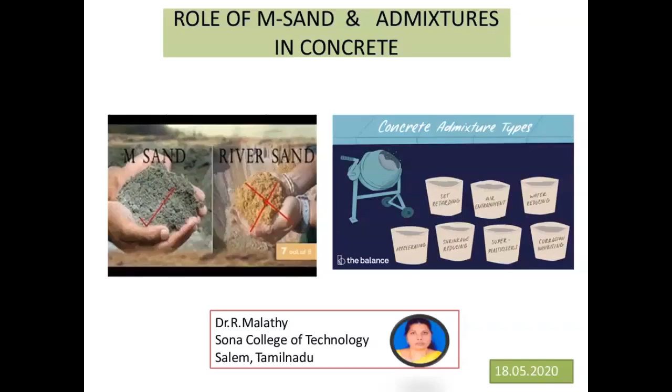So far, traditionally, we have used river sand or natural sand as fine aggregate, and that was the choice made by the constructors. But nowadays construction is going up, there are a lot of construction activities going on, and the utilization of river sand is also picking up. In that case, we cannot use that much river sand, and we cannot exploit the natural resources more. So we have to try to find an alternative for this fine aggregate.

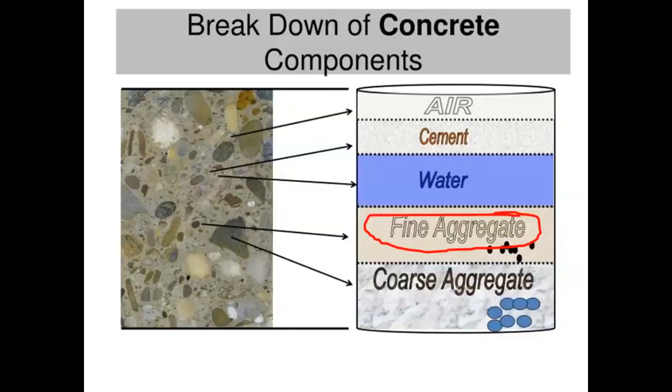In such a case, we are trying to make some M sand. M sand is nothing but manufactured sand. Most of us think M sand is crushed stone sand. It is not so. Whatever alternative material we are trying to use for replacing river sand is called M sand, not only crushed sand or crushed stone dust.

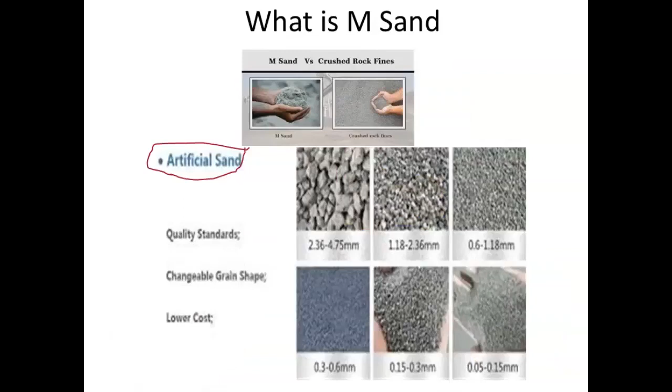So we have to go for M sand. M sand not only means crushed sand, it may be other materials also. There are some steel slag and other alternatives or industrial byproducts that can also be used as replacement for river sand. Why we have to go for M sand is the growing demand.

As I said already, there are a lot of construction works going on, and 30 to 35% of volume is used as fine aggregate. In such a case, there will be a demand, and also global scarcity is there. Now the government is banning it, and for remote locations we have to bring the river sand to that place. The transportation cost and energy consumption is going to be more, and also there are some impurities in the river sand.

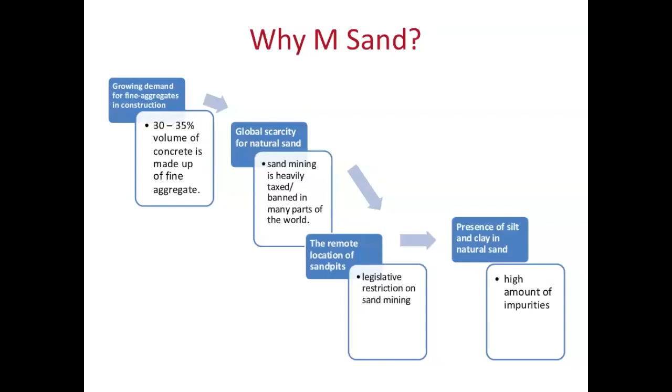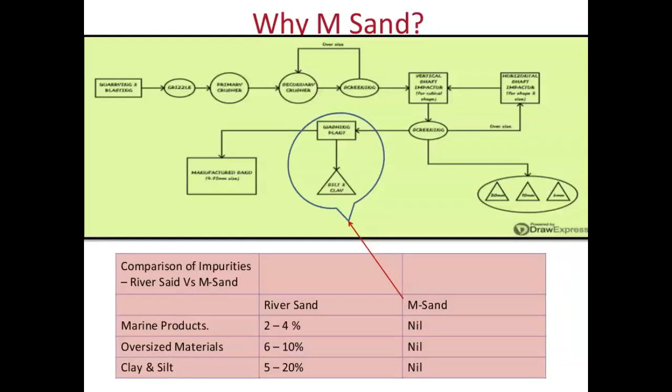Like clay particles and organic impurities, which may give some adverse effect. So we have to remove all these things, so instead we can go with M sand. If you see the process of making M sand, after washing the clay and silt, only then will it be brought to the site. Because of that, when you compare the impurities in river sand and M sand, there is no impurity in M sand, so definitely it will give good property.

When you compare natural sand and M sand - if you mine the natural river beds, soil erosion will occur, causing danger to reservoir structures. Whereas for M sand, 100% natural sand is replaced with M sand, so it is a high product aggregate. And at one point of time, definitely there will be no natural sand available - there will be scarcity.

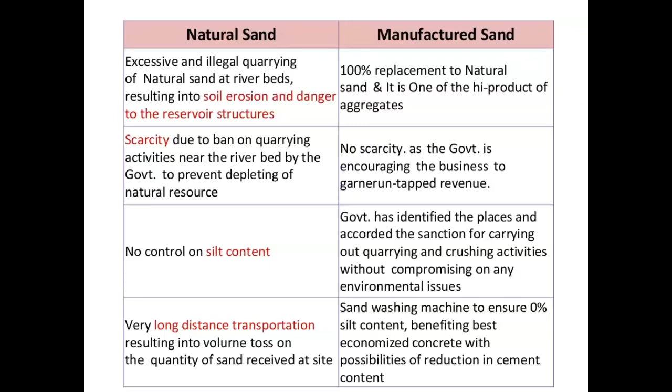But whereas for M sand, there won't be any scarcity at all. Natural sand contains silt content, whereas for M sand, there are no impurities. The long distance of transportation can be avoided while using M sand—whatever the nearby available quarry is there, from there you can take the M sand. Also, adulteration is possible with natural sand, whereas in M sand it is not so.

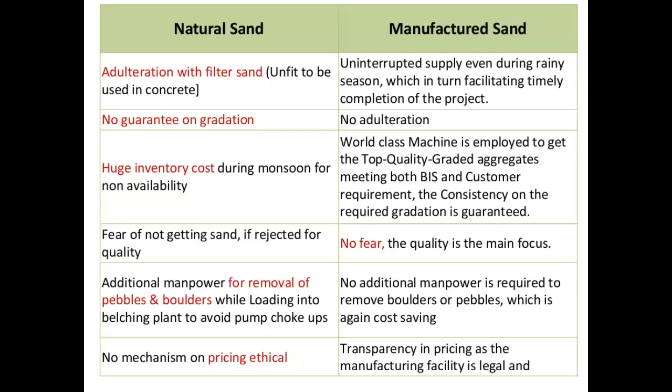We cannot guarantee gradation with natural sand. The gradation of natural sand was done with zone 1, zone 2, zone 3, zone 4 like that. But here, whatever zone you want, whatever gradation you want, you can make it up with M sand. Also, a huge inventory cost is there for natural sand, whereas in case of M sand it is not there. Removal of pebbles and boulders requires additional manpower, and there will be additional cost.

Usually for M sand, we should have some general requirements. Anyone who wants to utilize M sand, we have to see these things are fulfilled: whether it has higher crushing strength, whether the surface structure of the particles is smooth, whether the edges of the particles are rounded, the ratio of fines below 600 microns is less than 30%, there should be no organic impurities, silt should be present within less than 2% only, and there is a permissible limit of fines below 75 microns which should not exceed 15%.

If you see the sieve analysis for zone 2 sand, we have to sieve the river sand to get it as zone 2. Whereas in case of manufactured sand, by manufacturing itself, whatever zone you want—whether for plastering purpose you need finer sand, or for concrete purpose you need coarser sand—according to the zone you can have it by manufacturing the sand.

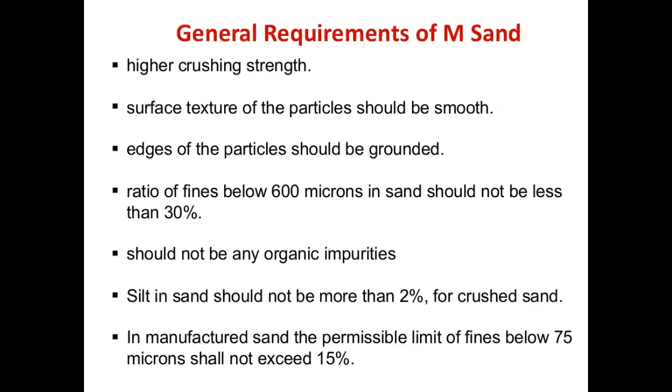If you see the shape of river sand, it is spherical in nature, whereas for M sand it is cubical in nature. Usually for good strength, the particle shape should be cubical. Then only there will be good particle packing, and it improves the strength of the concrete.

Gradation cannot be controlled for natural sand, whereas it can be controlled for M sand. Particle size also should be limited. Silt, organic impurities, specific gravity, water absorption—everything is within limit for M sand. The advantage of M sand is because of the cubical particle, it has very good interlocking and particle packing property, which improves the strength of concrete.

Only thing is, the workability of the concrete is reduced significantly, so for that we can use some super plasticizers to improve the workability of the concrete.

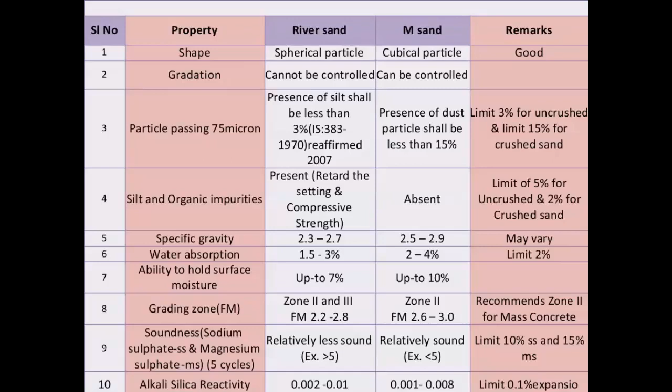When you see workability and its retention, for river sand it is very good, whereas in M sand it is somewhat less. For that we have to control the fines, apply water absorption correction, and use plasticizers. For setting, river sand is normal, whereas M sand is faster—for that also we can apply water absorption correction and use some retarders. When you see compressive strength, river sand is normal, whereas for M sand, because of better particle packing, it has higher compressive strength.

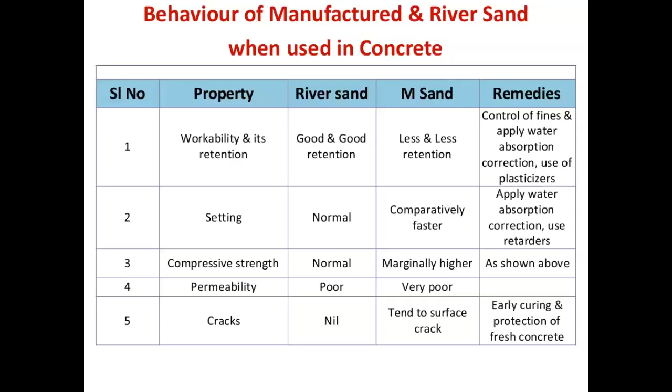Now the do's and don'ts while using M sand. Mostly the problem while using M sand is that some clients ask me—after 2 days, it is leaking. So the thing is, they are not using ready-mix concrete properly. We have to clearly check and measure whether they have used the proper gradation of sand, whether proper pressure has been used, and whether it has been washed clearly without any impurities.

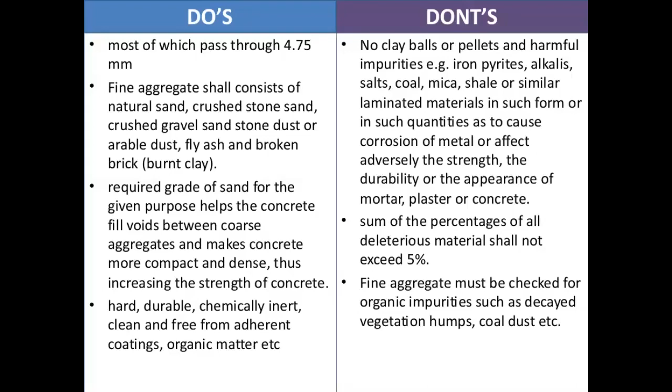With all these measures, only then should we allow them to use M sand for making concrete. Otherwise, there will be problems, and proper early curing is necessary. When we use chemical admixtures, we must check whether they are compatible with the properties of M sand and cementitious material. So while doing this, M sand is definitely a good alternative, and we can check the quality of M sand at the site in an easy way.

We have to check whether the M sand is of deep, grayish, cubical and rough texture, with no white color. It should not be sticky, and when mixed with water there should be no problem. If there are clay or organic particles present, when you rub it against your fingers there should not be any stain, as that represents impurities. In this way, we can utilize the M sand well.

It is used 100% because of the necessity, and it is the best alternative for natural sand. One of my PhD scholars completed a complete study on workability, strength, and durability properties. Everything was good—up to 70% replacement of natural sand with M sand gives very good properties. Beyond that, we have to use some plasticizer to improve the workability of the concrete. Otherwise, it is so good, and compared to natural sand, it gives good strength and durability properties.

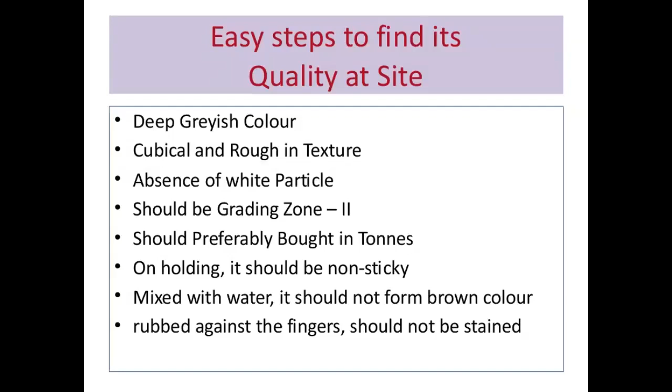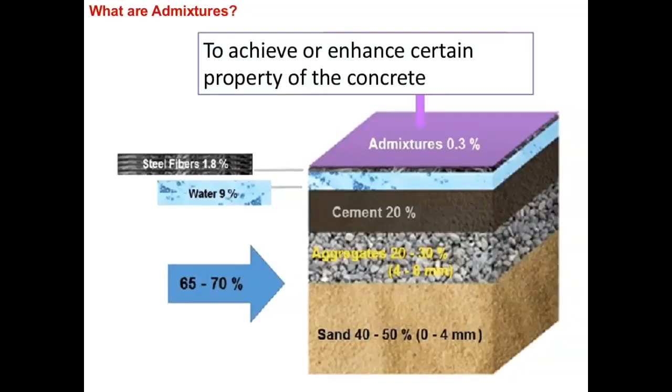Now let us go to the next part of this presentation, about admixtures. I hope some speakers have already touched upon admixtures. Other than cement, aggregates, and water, the additional ingredient used is called an admixture, which is added to achieve or enhance certain properties of the concrete.

So we can go with admixtures other than sand and water, for replacing cement also, and to give additional properties to the concrete, or in certain circumstances to improve certain properties of the concrete. We can also go with chemical admixtures.

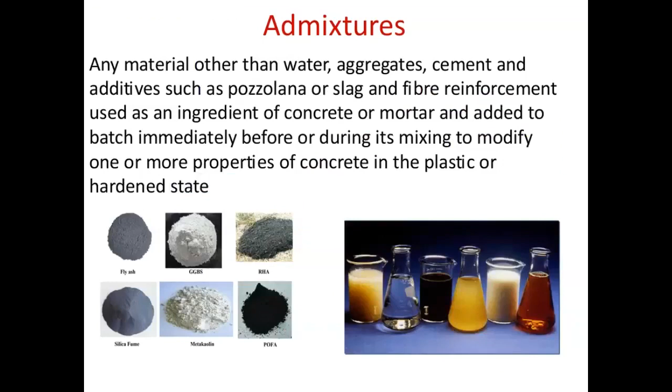Why do we use admixtures? To increase the strength of the concrete, to improve workability, to attain early strength, to control the setting time of concrete, to reduce permeability, to control efflorescence, to improve color vibrancy, to meet durability requirements, and to control shrinkage, among other purposes.

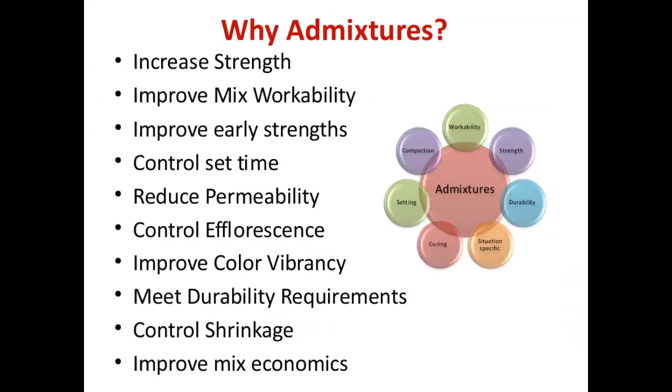Admixtures are not new; they have been used since 1935, starting with plasticizers, and many types of admixtures have since come into use for different purposes.

When we talk about admixtures, everybody has heard about mineral admixtures and chemical admixtures. One more type is bio admixtures. I'm going to talk more about bio admixtures because we have done research on them. Most participants may have already heard about mineral and chemical admixtures, so it may not be new, but I will enlighten more on bio admixtures. First, let us see something about mineral and chemical admixtures.

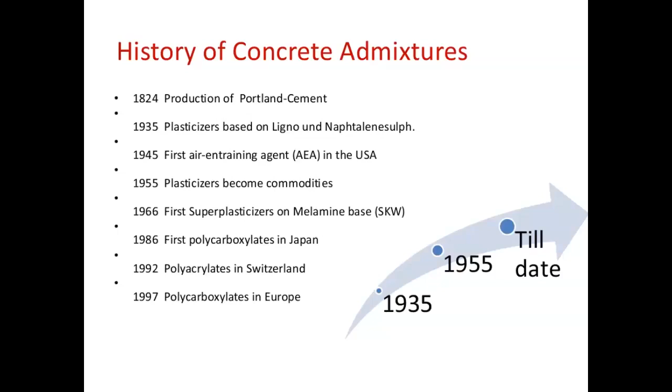What does pozzolanic material mean? Pozzuoli is the place where the first pozzolanic material was obtained. So all materials which replace cement are called pozzolanic material.

Cementitious material: most pozzolanic materials like low calcium fly ash don't have any cementitious property initially—only after the cement gets hydrated does it start reacting with the hydrated product. Whereas cementitious material like GGBS initially contains some cementitious property. We also have materials with both pozzolanic and cementitious properties, like high calcium fly ash, natural materials like volcanic ash, and byproduct materials obtained from industry as waste.

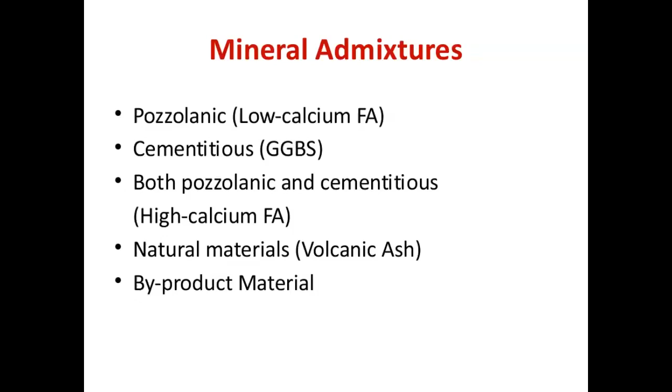For example, if I use 70% cement and 30% fly ash, first the 70% cement will be mixed with water and get hydrated. Only the water we add will be utilized by the cement for the hydration process. After hydration, CH and CSH are formed. Once CH—calcium hydroxide—is formed, the fly ash starts reacting in what is called the pozzolanic reaction or secondary reaction with this CH, converting it into CSH.

So initially for 70% of the cement only the hydration process is taking place, so the heat of hydration will be reduced. Whereas for normal concrete, 100% starts reacting immediately, so the heat of hydration will be more.

Increasing the water tightness is when we use mineral admixtures, it will form the CSH gel, more CSH gel. Because of that, the pores are reduced. Not only that, some mineral admixtures will act as filler material also, so that there will be water tightness. And it will reduce alkali aggregate reaction, improving chemical resistance and improving early strength, workability and extensibility.

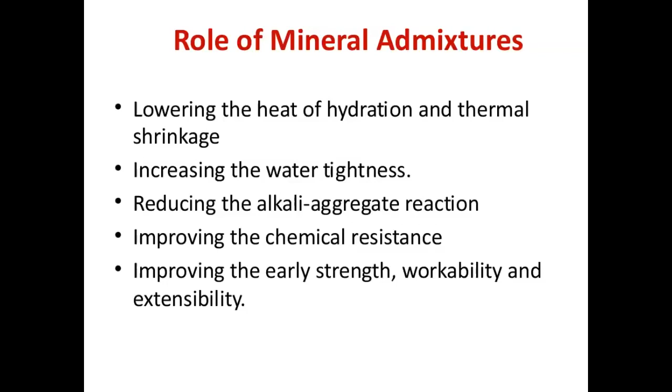What should be the requirement for mineral admixtures? Mainly for mineral admixtures, higher silica content should be there. Why it is needed is for normal cement it has more calcium, so that it can react immediately and it will form calcium hydroxide and calcium silicate hydrate, CSH gel.

The CH is not good for the concrete. So whatever the way, we have to reduce the CH quantity and increase the CSH quantity. So once CH is formed out of the hydration of cement, when this mineral admixture contains SiO2, then it consumes that CH and converts it into CSH. So for any mineral admixtures, it should contain more SiO2. So we have to keep it in mind.

Another one is the spherical shape of the particles will have more mobility and it will improve the workability of the concrete, and also the hydration, secondary pozzolanic reaction will be very fast.

Higher specific surface area. That means normally for cement, its specific surface area is 300 to 400 meters square per kg. That means when you spread over 1 kg of cement, it will occupy a surface area of 300 to 400 meters square. Whereas if you take mineral admixtures like silica fume and metakaolin, their specific surface area is about 20,000 meters square. That means 1 kg of these mineral admixtures will occupy around 20,000 meters square. That means its specific surface area is more, its fineness is more, so very quickly it will react, so we will get early strength in the concrete.

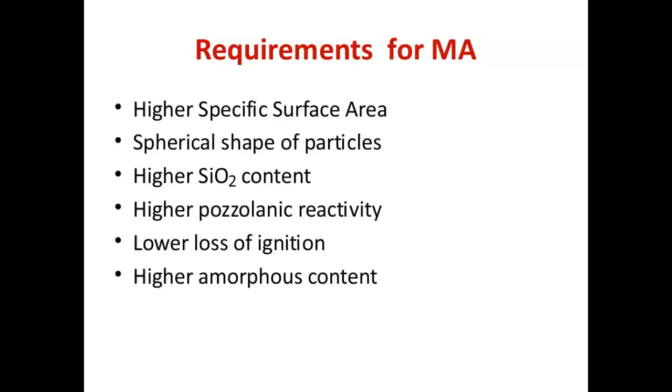And the higher pozzolanic reactivity, loss of ignition should be low, and higher amorphous content. These are all the requirements of mineral admixtures.

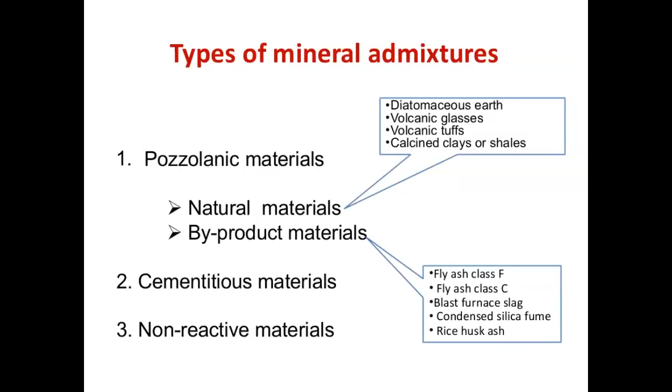As I said, the type of mineral admixtures, the pozzolanic materials are natural or byproduct. Natural materials are these things, and the byproducts are fly ash, blast furnace slag, silica fume, rice husk ash, and all. So we know that fly ash is coming out of thermal power plants, and blast furnace slag is from steel industries, silica fume from ferrosilicon industries.

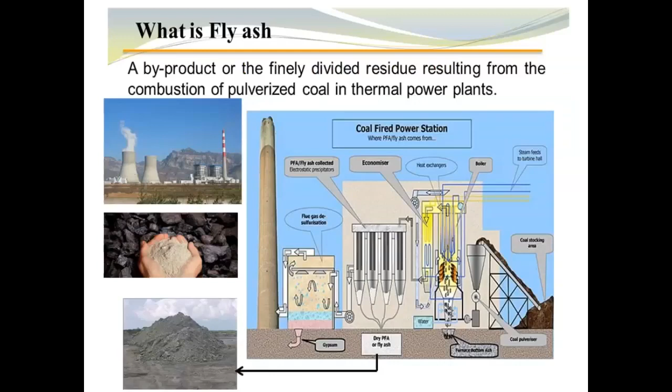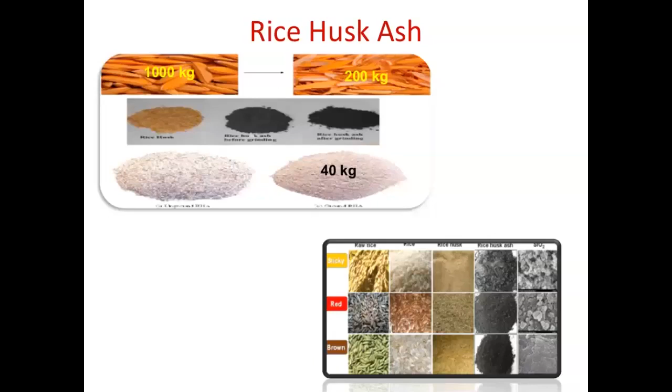Because of that, it will react and convert CH into CSH. So these are all the mineral admixtures used in concrete. So mineral admixtures can be used for improving workability, durability in thermal cracking and chemical attack.

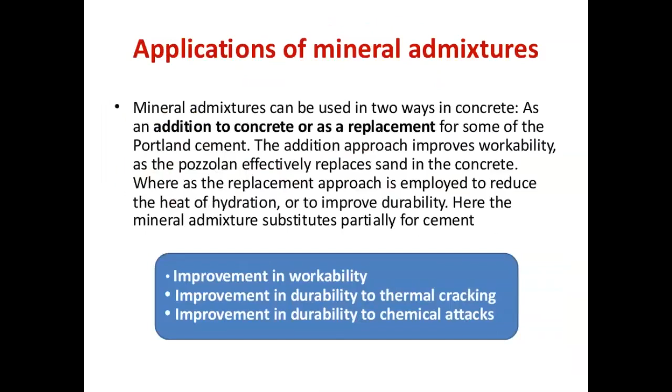So addition of mineral admixtures to the concrete will improve the chemical durability and improve the impermeability of the concrete, and we can attain strength at early ages. Alkali silica reaction can be reduced, and it will resist acid, sulfate, and salt water.

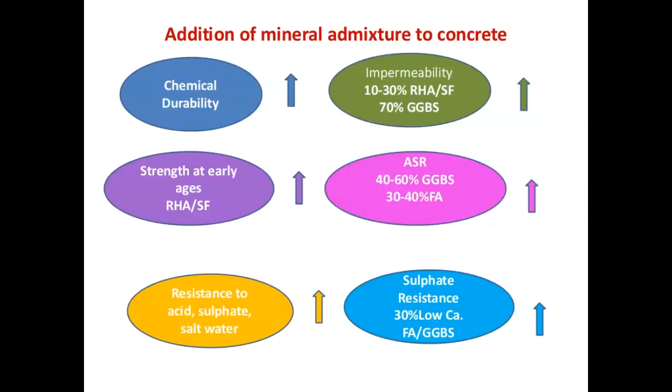So there are plenty of advantages over using mineral admixtures, and these mineral admixtures are not a new product, it is the byproduct of the industry, it is the waste from the industry. So we can very well use the waste. The waste is not a waste, it is a boon to the construction industry, and can be effectively used.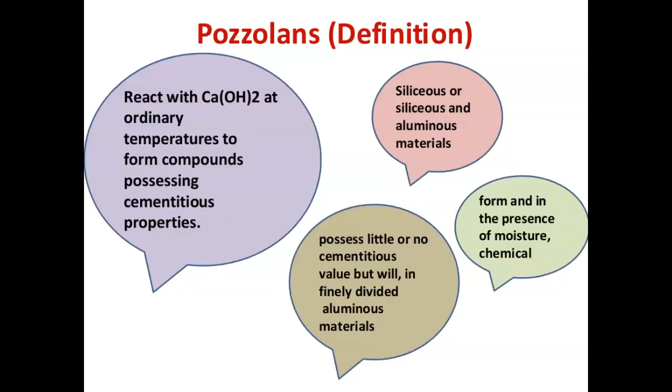These are all the reactions, as I said, the Ca(OH)2, that is calcium hydroxide, is converted, and it may be a siliceous material or aluminous material. When in the presence of moisture, it will form, and it may possess little cementitious value. So in that way, when you see the pozzolanic reaction here, in this first picture, there is a first reaction where there is a lot of CH, and in the second picture, because of pozzolanic reaction, CH is converted into CSH.

If you see the mineral admixtures, you can see calcium oxide (CaO), silicon dioxide (SiO2), and aluminum oxide (Al2O3). These three are the main components present in mineral admixtures, which contribute towards the improvement in properties of concrete. Looking at PC, which is Portland cement, it has very less SiO2, and some calcium oxide and some aluminum oxide.

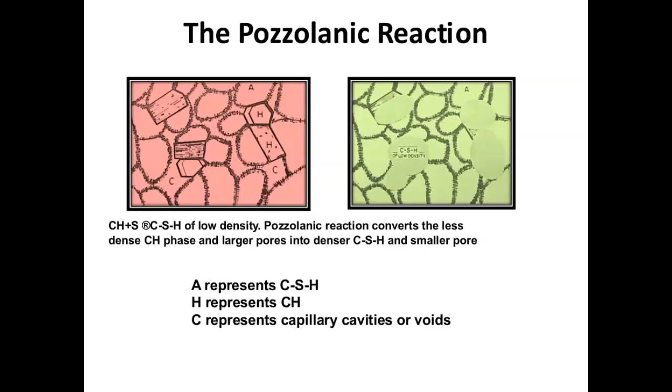Whereas if you see silica fume, in the top corner, it contains more silicon dioxide, so it will react very quickly and forms CSH gel very fast. Natural pozzolans also fall in this category. So if you see this, the present proportions only prove whether it is going to be added as admixtures, whether it can convert CH into CSH.

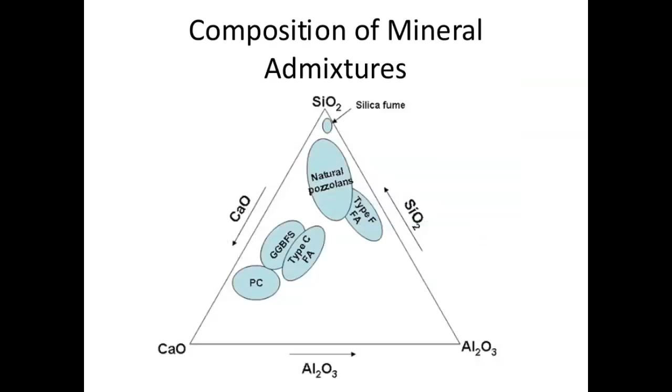Now let us come to chemical admixtures. These are some of the codes used for chemical admixtures. If you see the types of chemical admixtures, you have water reducer, accelerator, retarder, and some special admixtures. These four are the main chemical admixtures used everywhere. But the special admixtures are for specific purposes, such as corrosion inhibitor, anti-washout admixture, and ASR controlling admixture.

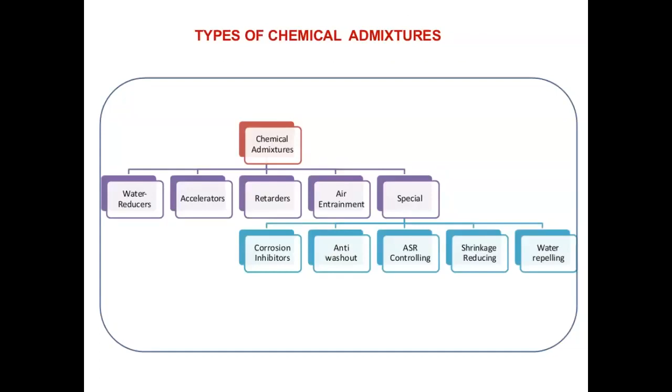But when you reduce the water cement ratio, the strength will increase. But when we reduce the water cement ratio, the workability will be affected. So in such a case, to get both strength and workability, we have to add some admixture which will reduce the water content. For this we can use water reducing admixtures.

In the mix design criteria, usually we consider workability and strength. For example, if I want workability as A and strength as B, we can use admixture to some extent by reducing some water content, minus water content. Then it will improve the workability - workability equal to A and strength beyond B. That means it will increase the strength.

In another case, you can add admixture and reduce water; because water is reduced, the water cement ratio will be reduced. Once the water cement ratio is reduced, cement can also be reduced. So you can reduce some quantity of water as well as some quantity of cement. By doing so, the workability you want will be achieved, and it also satisfies the criteria.

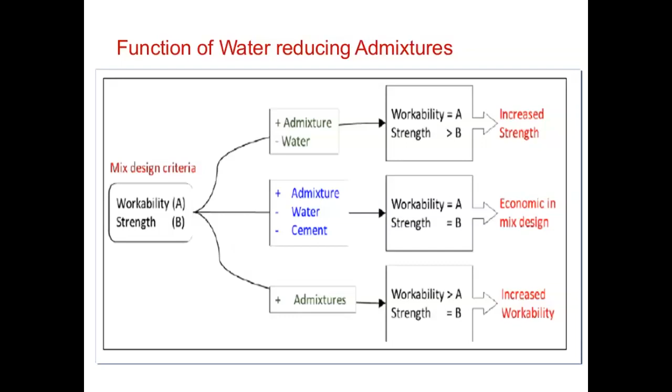But when we add only admixture without reducing water or cement, the workability will be improved, but the strength will remain equal. In such a case, quality improves - this is not the function of reducing water, it is the function of water reducing admixture, for which we use plasticizers.

But whatever chemical admixtures we use, we have to be very careful and take some precautionary measures. Otherwise we will get negative effects when we use plasticizer as a working admixture. This plasticizer has to be added in the correct quantity or correct dosage. When you overdose the plasticizer, beyond the requirement, it will give adverse or negative effects on the performance, and it is also uneconomical.

Usually, when you see the cans available in the market, they give a specification that 1% by weight of cement you have to add, or 2% by weight of cement. But we cannot just add that quantity blindly. We have to check it and whether it is compatible with the cement or not. Accordingly, we have to fix the dosage of the plasticizer.

So by conducting the test, we have to find out the characteristics beyond which it will give negative effects or reduce the properties or strength of the concrete. Another aspect is concrete yield. So once we use plasticizer...

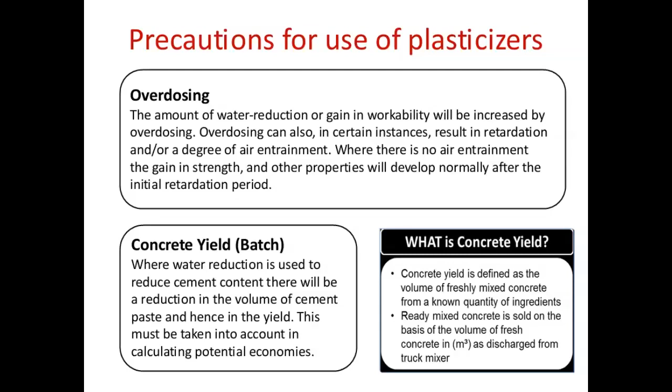Okay. Now it's okay. Yeah.

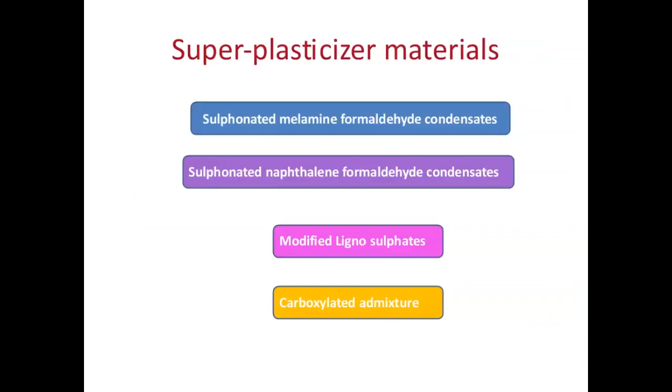The mechanism is usually when cement particles are mixed with water, what happens? The particles are oppositely charged, meaning minus plus, like that. So automatically when the two are added together, the cement particles will be clustered together. But once clustered, what happens inside this cluster? Some unhydrated cement is left out and won't get hydrated, and some water gets clustered too, so that water is also not used for hydration purposes.

So some unhydrated cement is left out, and whatever quantity of cement and water we added is not fully utilized for hydration, which reduces the strength. Otherwise, the superplasticizer acts as a dispersant agent, and makes the cement particles form a chain so that all are minus, all are plus, then same poles get repelled. In this way the cement particles are dispersed and may not get clustered, so all the cement particles get separated and we get proper hydration of cement.

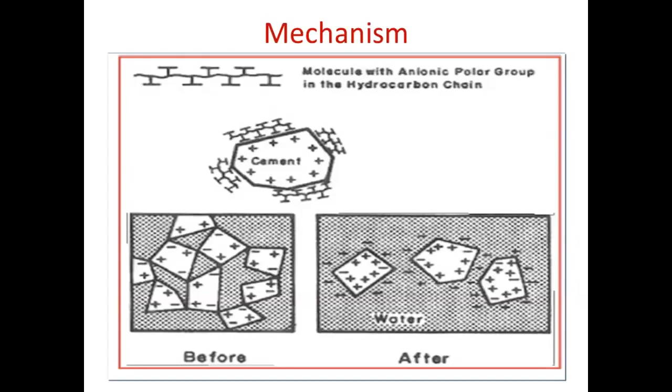So superplasticizer not only improves the quality of the concrete but also improves the strength of the concrete. When particles are clustered together, with water reducer, you can see they are not clustered, so the better mobility between particles improves the workability.

Clustering of cement will leave some unutilized, so it gets wasted. For full utilization of cement and water, this mechanism of superplasticizer helps the concrete improve both workability and strength. Now let's look at applications where we can go for superplasticizer.

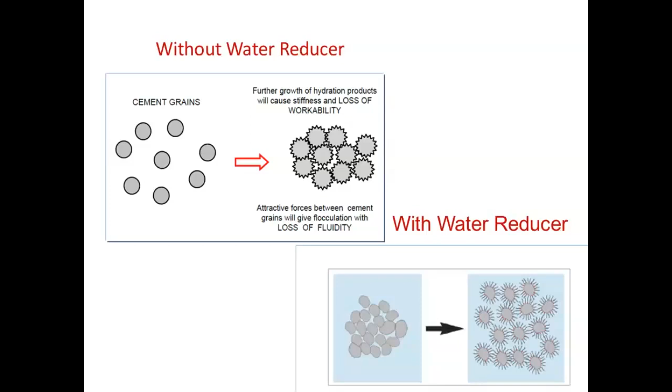One engineer asked me that for M20 concrete he has used superplasticizer. Whether it is necessary to use this water reducing admixture for M20 grade concrete, we have to check, because for M20 concrete usually we have a water cement ratio of 0.5, which is sufficient for workability. Once you go for higher grade concrete, you have to reduce the water cement ratio, and in that case, to improve the workability, you need superplasticizer.

Another case is self-compacting concrete, for high flowable concrete, you need to go with superplasticizer with less water to achieve strength as well as workability. But without knowing these things properly, people are not given proper input about the superplasticizer, they just try to add it.

Another engineer asked me about when he was constructing columns. There were 20 columns; for about 10 columns he did not use superplasticizer. After that, one person came and told him about superplasticizer, so for the remaining columns he used it. That is also not correct.

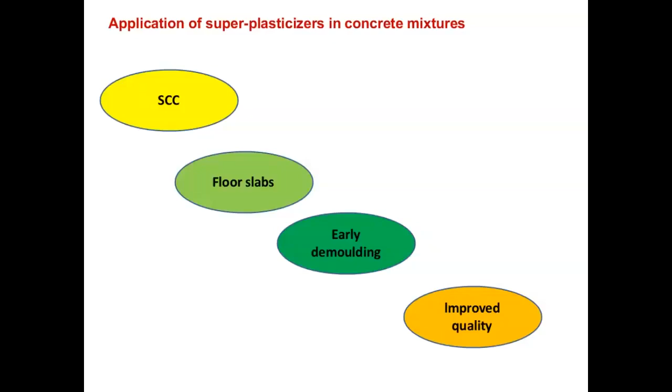Because of the superplasticizer, strength and other properties get changed, so some columns will behave differently from others. We should know better about these admixtures before using them, and check whether they are applicable for that particular situation or not. For example, self-compacting concrete, floor slabs for early demolding, and for improved work quality, we can go for superplasticizers.

Then we have some precautions while using superplasticizer. As I said, for mix design, since we are reducing some quantity of water and cement, we can add about 5% extra fine aggregate. Also, regarding flowing property, when you use superplasticizer, it will lose its flowing property after some time, so the concrete should be used within 30 to 45 minutes.

Otherwise, what we can do is, while going with ready mix concrete or other methods, before placing, 5 to 10 minutes before, we can add the superplasticizer. Also, after adding superplasticizer, we have to mix continuously for 5 minutes to improve workability. And the dosing also, as I said, correct dosage of superplasticizer should be used. Excessive vibration may create segregation and bleeding, which we also have to keep in mind.

And for formwork, because of this superplasticizer, there will be extra pressure developed in the concrete, so we have to ensure that the formwork is strong enough to carry that extra pressure.

And this is what I already told. Accelerators and retarders, everybody is using. We know that accelerator will increase the rate of hydration and reduce the setting time, whereas retarder will slow down the rate of hydration but increase the setting time. With accelerators, the ettringite formation is very quick. In case of accelerator, it will increase the rate of dissolution of the tricalcium silicate.

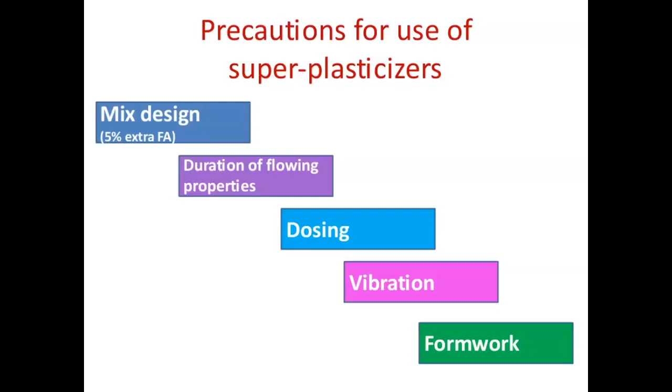So these are all the materials used.

Sir, can you see the slide fully? Anil Pillai sir? I can see, Kumar sir? I see the slide fully. Yes, I can see the slide. Yeah, okay sir, full slide I am able to see.

So for using accelerators also, we have to have some precautionary measures. The evolution of heat will be more. By using accelerators, it will accelerate the hydration process. Because of that, heat evolution will be more, and we have to take care about that. Corrosion may be initiated earlier when we have more reinforcement, so in such a case we can try to avoid accelerators, and the dosing also should be done correctly. When you use ready-mix concrete with accelerator, after some time of transportation it may settle, either retarder or accelerator. After mixing, if you take some time before placing, we have to once again mix it properly, otherwise there will be some settlement.

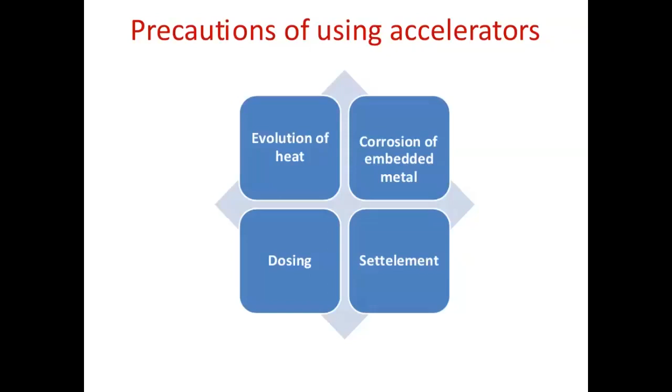Retarding admixtures, these are all the chemicals we are using, and the mechanism of retarding admixture is by adsorption or precipitation. These are all used for large pour, sliding formwork, hot weather concreting, and ready mix concreting. Here also we have to have some precautionary measures, like it should be poured properly, because...

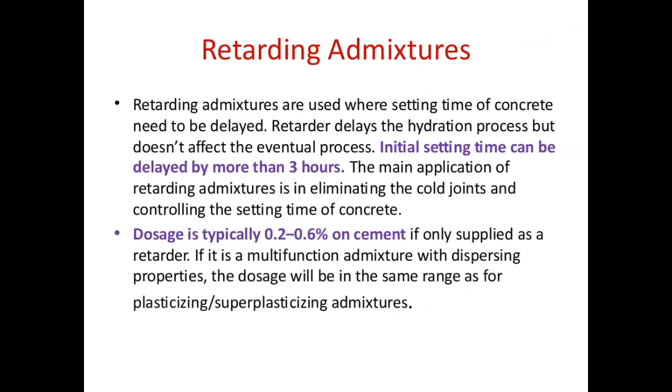Hello. Hello, it's coming broken here because of the testing, I suppose. Yes madam, hello, yeah the voice is coming broken. Yeah, now it's okay. Hello, can you hear me sir? Yes. Yeah, now you're audible.

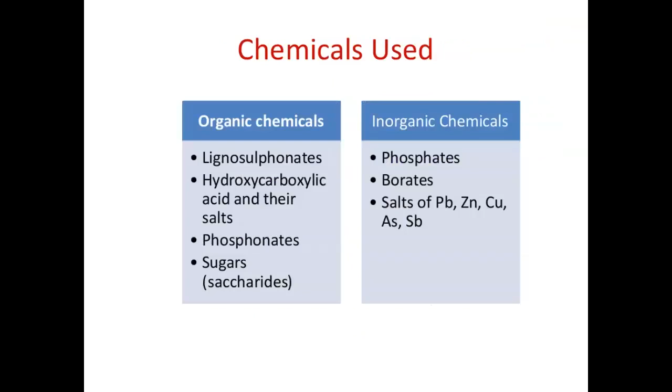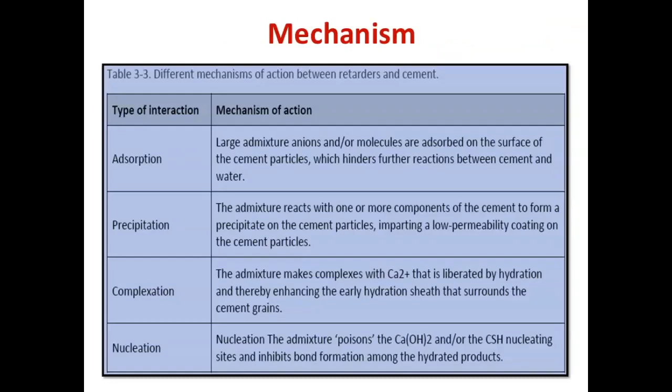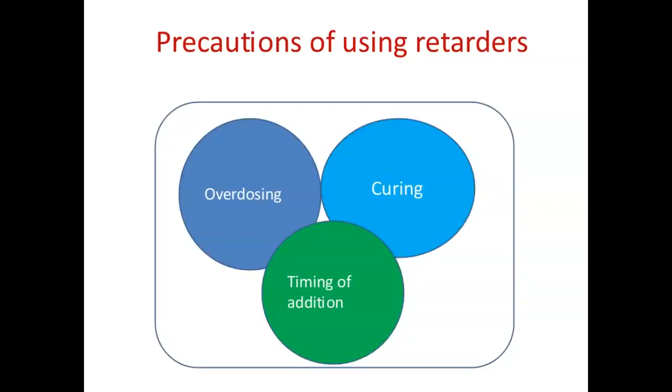Wood resins or animal and vegetable fats are being used as chemicals in air entraining sources. A very small quantity of dosage of air entraining admixture is sufficient. This is applied particularly for freeze and thaw resistance, poor aggregates, pumping of concrete, and extruded concrete. Here also we have to be very careful while using air entraining admixtures, with mix proportion, dosing, air content, and temperature conditions. During high temperature, the property of the air entraining agent may change or give a negative effect. The mixing time should be proper, and transportation also we have to do carefully.

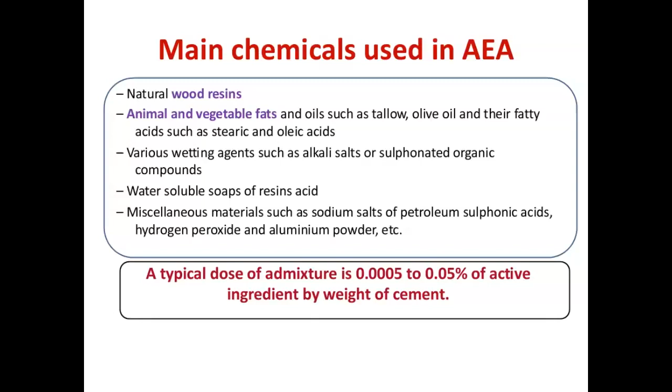So far we have seen mineral admixtures and chemical admixtures. Mineral admixtures replace particularly cementitious material, acting as a cementitious material or a filler material. Chemical admixtures are used for achieving a specific property of the concrete, either improving that property or reducing the property of the concrete, using chemical admixtures.

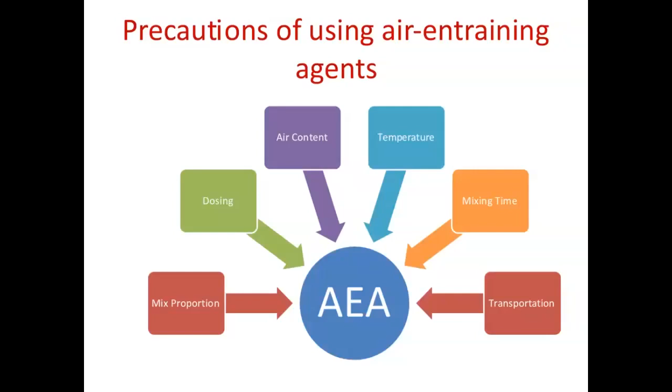Now let us see bioadmixtures. Bioadmixtures are coming up nowadays and are eco-friendly and non-toxic. When you use chemical admixtures, some of them will have an irritating effect to the layers, whereas bioadmixtures are user-friendly, eco-friendly, non-toxic, and also sustainable. So we can go with bioadmixtures. I am going to explain how to improve these properties in concrete using bioadmixtures, on which we have done some research work. For curing purpose, for corrosion inhibition, and for crack healing, bioadmixtures are being used.

So this is not a new one. Already in the Roman period itself, bioadmixtures were used, like urine, blood, and straw. The urine was used as a retardant, the blood was used for air entrainment, and straw was used for fibers. So it is not new to us, the Romans already tried this.

You might have heard that they used jaggery or egg for improving the properties of lime concrete. These and all they have used in earlier days. Now it is coming up again, how biomaterials can replace chemical admixtures, which are long-lasting admixtures, and not only that, it improves the properties of the concrete.

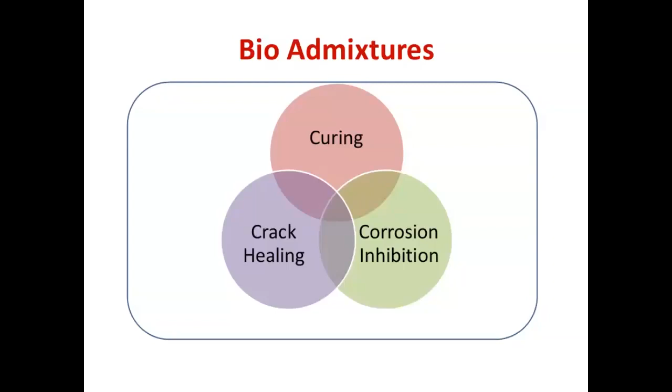Now, if you see this picture, the strength and durability of the concrete is improved by having bacteria. These microorganisms in concrete use a biomimetic technique for improving both strength and durability. The concrete also mimics the biological process happening with the bacteria. This same thing is used in the concrete structure. This is called biomimetics, or how we are imitating nature. The uniqueness or unique positive property in nature can be imitated for making our concrete structures.

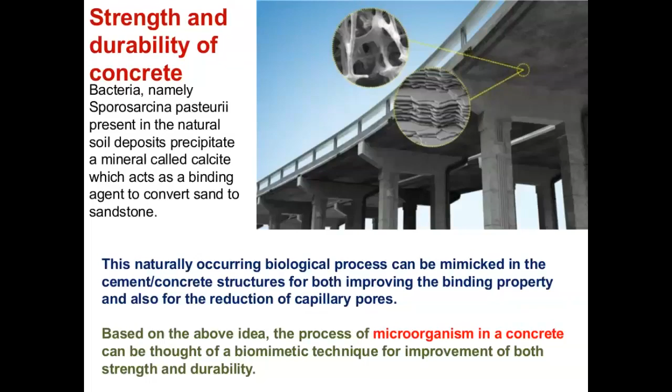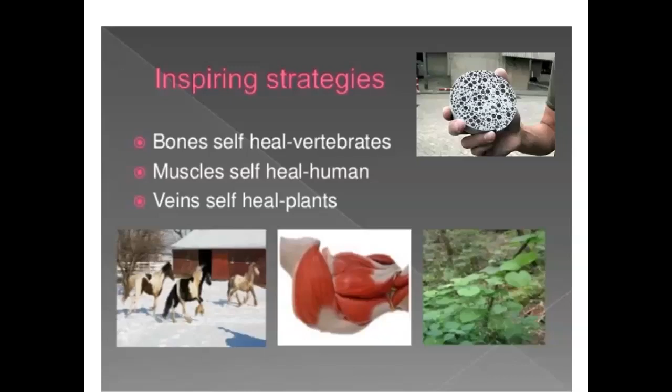See this, it is an inspiring strategy called bacterial concrete or bioconcrete. Normally this bioconcrete is used for self-healing concrete. Whenever a crack appears, the bacteria will grow and multiply 1,000 times. When it is exposed to air and water, automatically it will multiply and heal the concrete because it contains calcium lactate. Like our bones and muscles have self-healing property in humans, and in plants the veins have self-healing property, the same thing is being mimicked for concrete also, for self-healing.

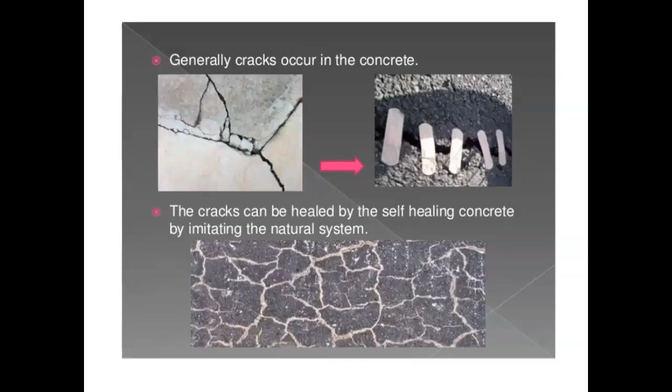So generally the cracks appear like this in concrete. When it has self-healing property, it automatically closes. These are all the crack-healing properties you can see at the bottom picture. This is the biomimicry of self-healing concrete.

Normally, for normal concrete, repairing has to be done mechanically, whereas here it heals on its own, and it also increases the strength by about 60%, extending the lifetime of the structure. Usually the mechanism involved is: once a crack is formed, the concrete plus carbon microfibers and microcapsules are formed inside.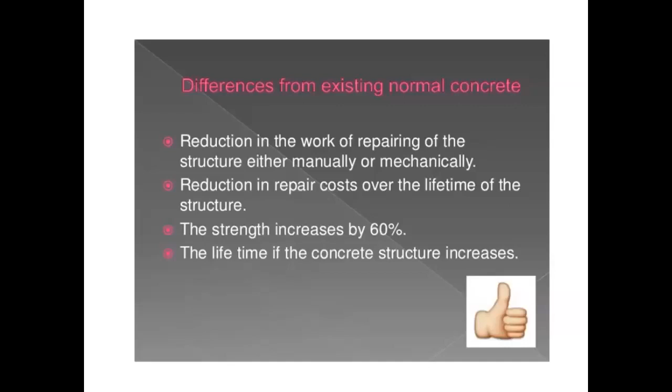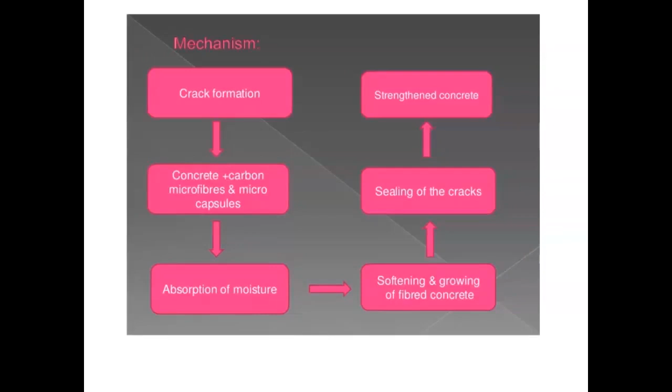Next, I am going to talk about self-curing concrete, or self-curing bioadmixture. Usually, what is self-curing or internal curing? Internal curing of concrete means there is no need for external curing.

After concreting is done, we do 28 days of water curing for improving hydration of the cement. Why we apply water from outside towards inside is that some of the unhydrated cement may remain because of unavailability of water, since the mixed water may evaporate and be lost. So to compensate, we apply water from outside, which penetrates inside the concrete and reacts with the unhydrated cement to form the hydration process. But it is not highly effective because when we apply water externally, it may not reach the inner depth of the concrete, so 100% hydration may not be possible.

Another issue is that the curing part of concreting is usually neglected or ignored by laborers, and labor may not be available, water may not be available, and electricity is needed for pumping water. So many problems are there, which is why internal curing or self-curing concrete is recommended. For self-curing concrete, the mechanism involved is that it stops the evaporation of water, minimizing or reducing water loss.

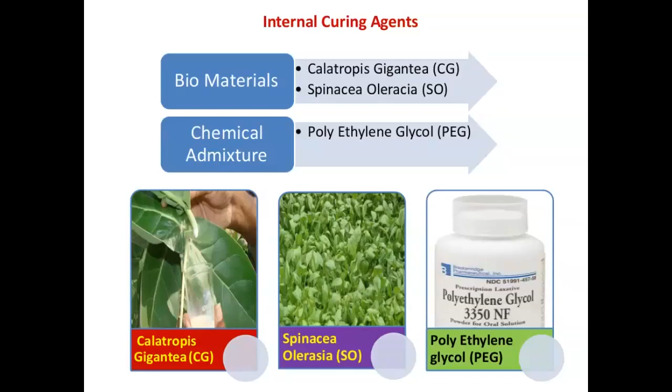So what we found is we have optimized the dosage of these materials. Spinacia oleracea is 0.6% by weight of cement, Calotropis gigantea is 0.24% by weight of cement, and polyethylene glycol is 0.3% by weight of cement. By conducting many trials, we found that this is the optimum dosage of these materials.

Why we have chosen Spinacia oleracea, the collard green, is that its green leaves have the capacity to hold water. So while cooking, you could see there is no need to add water when cooking greens, particularly collard green, which has more water holding capacity - it will use up water when you cook. So what we need for simulating is that it has to hold the water and release it for the hydration process of cement whenever needed.

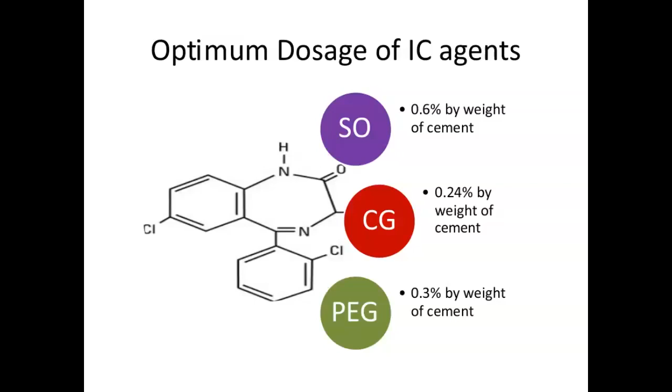Why we have chosen Calotropis gigantea is that we take out its milk. During ancient times, this milk was used for medicinal purposes. When a thorn was sticking in the leg, they would put this milk on it. What happens is it will stop the blood coming out, and after some time, watery material along with the thorn will come out. So it has the capacity to stop the water and blood from coming out, and also to act as an internal reservoir to store the water, hold it, and apply it for the hydration process.

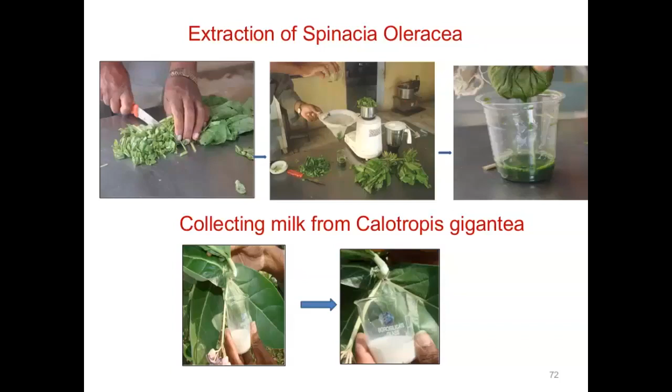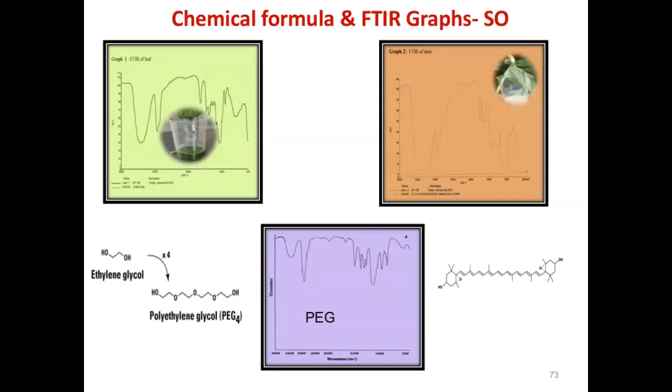And this is the chemical formula for FTIR, Fourier transform infrared. This study will give you the picture of how the structures and peaks are similar to that of polyethylene glycol. You can see the bottom picture shows polyethylene glycol, top two are collard green and Calotropis gigantea. See the structures and peaks are similar to polyethylene glycol, so it has the property of holding water, which we have proved.

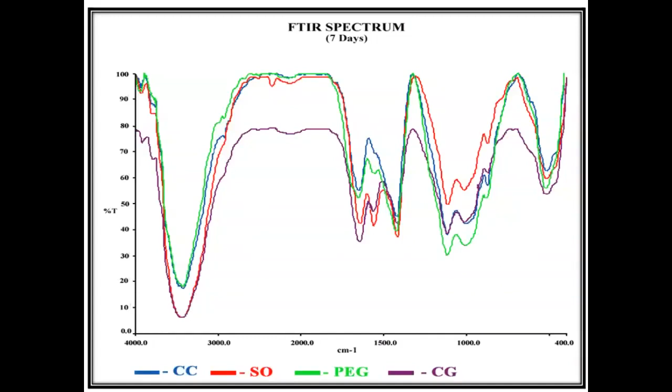Another analysis is by mixing collard green or Erythrum in concrete, after 7 days we made the concrete into powder, and for this we have also done FTIR spectrum analysis. Here too you can see the graph, curves, peaks, and stretches are similar to that of polyethylene glycol.

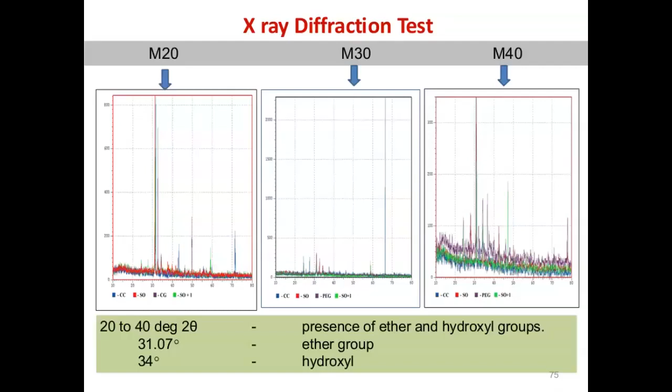The presence of hydroxyl ether shows that it has the capacity to hold water and stop water evaporation. So it has been proved that both biomaterials have properties similar to polyethylene glycol, and it is well proved that they can be added as a self-curing agent. That is what we have done, and we have also patented it - we have filed a patent.

Bioadmixtures can be used as corrosion inhibition agents.

Corrosion of reinforcement in concrete is a major cause of disintegration of concrete structures. When cracks or permeation occur, chloride ion ingress, acid, or water enters the concrete and touches the steel reinforcement, causing it to corrode. Once corrosion starts, the volume of the steel increases about 6 times, and since it cannot occupy the space inside the concrete, it tries to come out by making cracks. This is how corrosion happens.

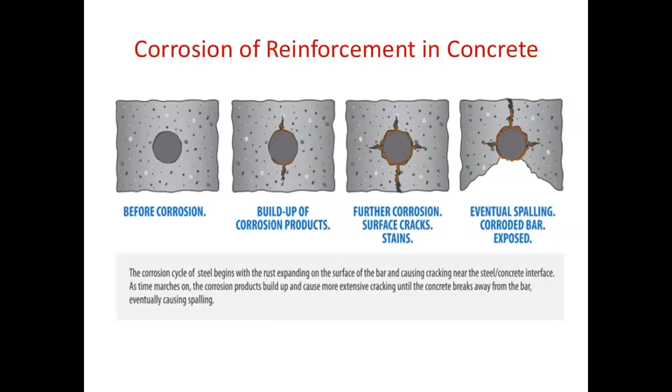Can we avoid this corrosion? There are many methods, one of the best being corrosion inhibitors used inside the concrete. We may use calcium nitrite mixed into the concrete, or use coatings on the reinforcement made from chemicals. But chemicals used for corrosion inhibition are again toxic. So we ask whether we can replace them with natural, organic inhibitors instead.

This picture shows the mechanism of corrosion and how it takes place. When we use plant extracts as a natural coating over the reinforcement, it forms a protective layer which does not allow water or acid to enter the reinforcement surface, thereby protecting the steel from corrosion.

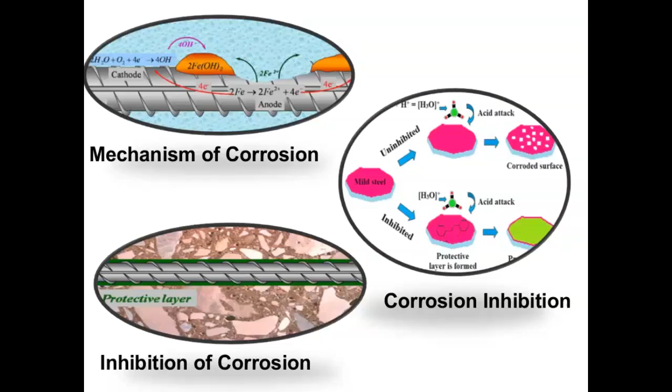In this picture, you can see how corrosion inhibition works on mild steel. If it is uninhibited, corrosion takes place. Whereas if it is inhibited by forming a layer over the surface, it remains green with no corrosion at all. Plenty of plants have been identified with this corrosion inhibiting property.

Sugar and jaggery are added, and many plants have been identified as possessing anti-corrosive properties, with many articles published on this. Aloe vera, garlic, moringa leaves, mango leaves - all are identified as corrosion inhibitors, and much research is ongoing, including for oil, gas, and many industrial plants. Not only reinforced concrete, but for any metal corrosion - steel, copper, any metal - we can apply these organic inhibitors, which are user-friendly, eco-friendly, non-toxic, and cost-effective.

How can we identify whether a particular plant possesses corrosion inhibition properties? It should have 4 components: S, N, O, P - that is, Sulfur, Nitrogen, Oxygen, and Phosphorus. If it contains any of these, it may have anti-corrosion property.

We also have to test it for phenol compounds and flavonoid compounds, and based on that we can identify whether a particular plant can be used as a corrosion inhibitor. Not just any part of the plant may have this property - it could be the leaves, fruit, root, seeds, or even bark. Any part may possess corrosion inhibition properties, and research is ongoing; we ourselves are doing research in this area and have identified many plants containing this corrosion inhibition property.